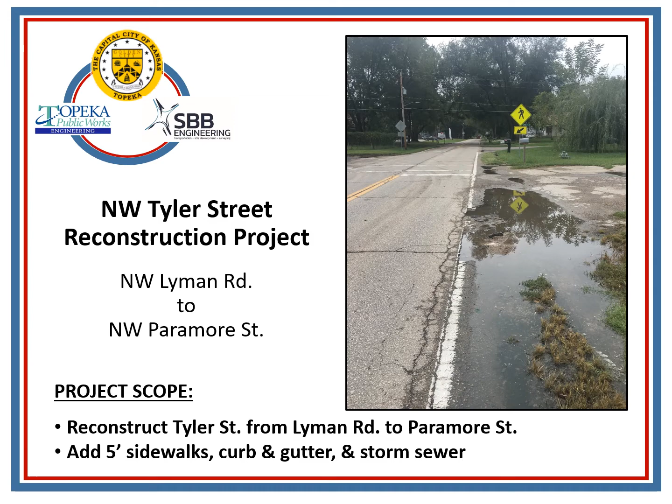The city has selected SBB Engineering to complete the project planning and design work for the city. I'm Brian Austin, and I will be the project manager for SBB Engineering. The project manager for the City of Topeka Engineering Department is Linda Voss. David Bevins is the Community Education Manager for the city. You may contact any of us with questions, ideas, or comments about the project.

The project scope includes the reconstruction of Northwest Tyler Street from Paramore Street to Lyman Road, and it will be completed in 2 phases. Project planning and design is occurring in 2020. Final design and utility relocation will occur in 2021, and Phase 1, Lyman Road to Beverly, will be constructed in 2022. Phase 2, Northwest Beverly Street to Northwest Paramore, is planned to occur in 2025.

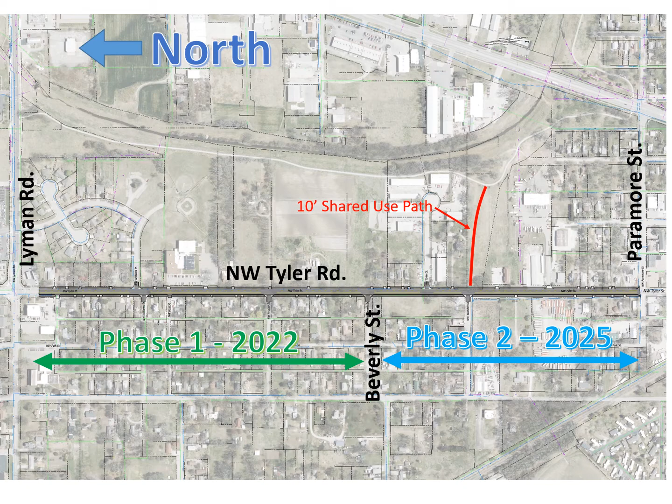So why Northwest Tyler Street? Well, the local desire for improvements to Tyler Street has been around for quite some time. The City of Topeka Planning Department conducted a neighborhood plan for the North Topeka West neighborhood that identified the reconstruction of Northwest Tyler Street as a priority. The Topeka City Council adopted this plan on February 26, 2016.

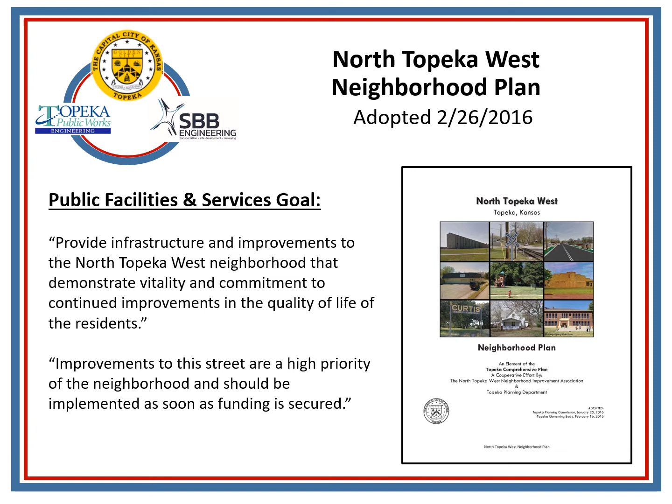The goal noted in the plan was to provide infrastructure improvements to the North Topeka West neighborhood that demonstrate vitality and commitment to the continued improvements in the quality of life for the residents. The plan also noted that improvements to Northwest Tyler Street were a high priority and should be implemented as soon as funding is secured.

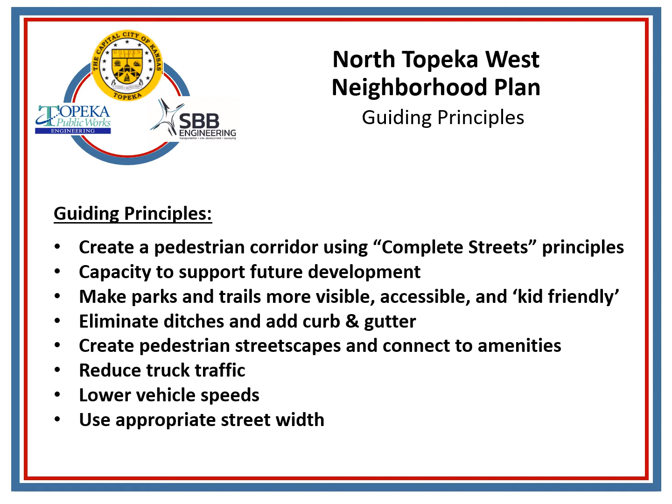What will the project include? The neighborhood plan identified some guiding principles for the project. These principles include creating a pedestrian corridor using complete streets principles, increasing capacity to support future development, make parks and trails more visible, accessible, and kid-friendly, eliminate ditches and add curb and gutter, create pedestrian streetscapes and connect to amenities, reduce truck traffic, lower vehicle speeds, and use appropriate street width.

In order to ensure the guiding principles from the neighborhood plan were incorporated into the project in the most practical and cost-efficient manner, the City of Topeka tasked SBB Engineering to develop 3 concept plans for the corridor. The first concept's focus was to develop a design that focused on low-impact development. The second concept's focus was to develop a 3-lane standard typical section for the City of Topeka that improved safety and roadway capacity by adding a center turn lane.

The third concept was to develop a 2-lane standard typical section that focused on limiting the project's footprint, reducing utility impacts, and limiting vehicle speeds. The pedestrian and bicycle improvements for the corridor were the same for all the concepts, and they will be discussed later in this presentation.

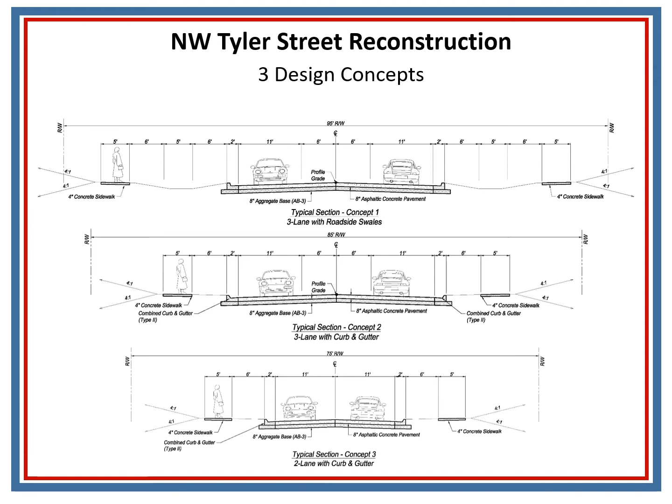Concept 1 focused on low-impact design to reduce the amount of stormwater runoff, take advantage of the site's high permeability soils, and improve stormwater quality runoff through low-impact design and stormwater best management practices such as vegetated bioswales. In order to do this, a 3-lane section was conceptually designed with roadside swales between the proposed back of curb and sidewalk. Curb flumes would convey stormwater runoff to the roadside swales behind the back of curb. This approach would increase infiltration and reduce stormwater runoff.

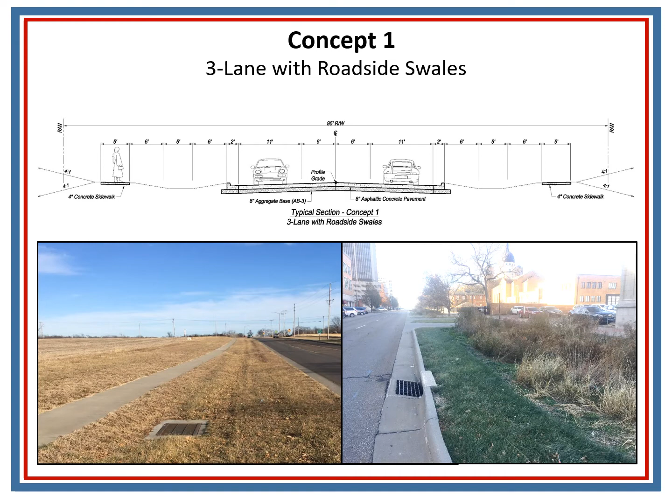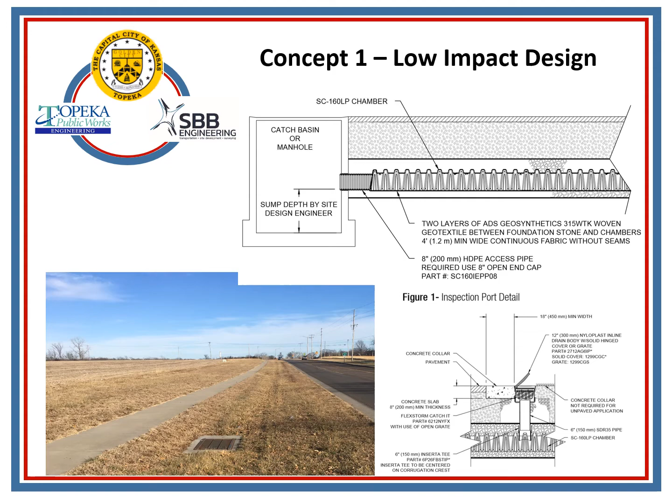In conjunction with this approach, this concept also included using underground open-bottom storm chambers instead of storm sewer pipe to allow for additional infiltration of stormwater. The storm chambers would also be able to convey the higher volume design flows similar to conventional storm sewer pipe.

While this concept would satisfy the focus of reducing stormwater flow and improving stormwater quality, this concept was not chosen to move forward with. There were a number of disadvantages to this concept that limited the benefit it provided. 1. Although the roadside swales would have mild side slopes and would be able to be mowed with any push or riding lawnmower, they may appear to some residents as ditches, which was specifically requested to be removed in the neighborhood plan.

And 3, the presence of roadside swales on both sides of the street would require more area inlets than a street with standard curb inlets. This would result in having parallel storm sewer systems on both sides of the street and would more than offset the cost savings from a smaller storm sewer system.

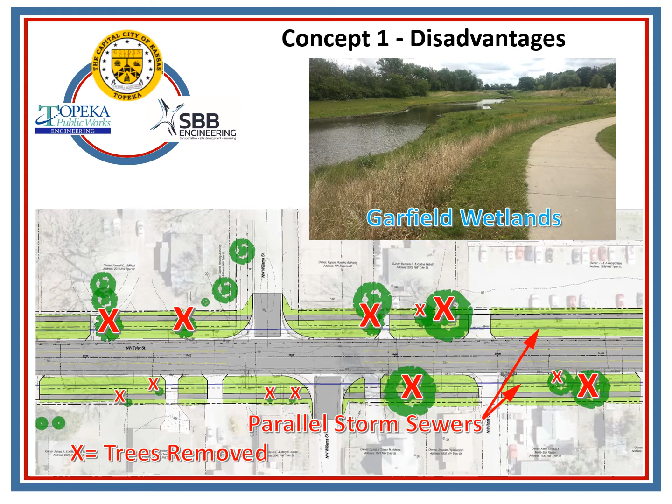In addition to the disadvantages mentioned, there are also downstream detention and water quality improvements in place at the Garfield wetlands. This downstream detention and water quality feature reduces the benefit of any water quality improvements made in conjunction with this project.

Concept 2 is a standard 3-lane typical street section. An example of this improvement is Northwest 46th Street between Topeka Boulevard and Rochester Road. Northwest Tyler Street has 54 driveways and intersections between Paramore and Lyman. This is a high driveway frequency and one that would typically result in the construction of a center turn lane to improve roadway capacity. SBB Engineering and the City of Topeka engineering staff reviewed the 5-year crash history on Northwest Tyler Street during the planning phase.

Although there were 15 crashes within the past 5 years, none of these crashes would have been preventable with a center turn lane. In addition, a traffic count showed that daily traffic is only about 4,000 vehicles per day. Common practice is to start considering a 3-lane section when there's a high number of turning maneuvers and the daily traffic approaches 8,000 vehicles per day. Since the vehicle traffic and crash data did not show that a 3rd lane would result in a significant safety or capacity improvement, this concept was not chosen as the design alternative.

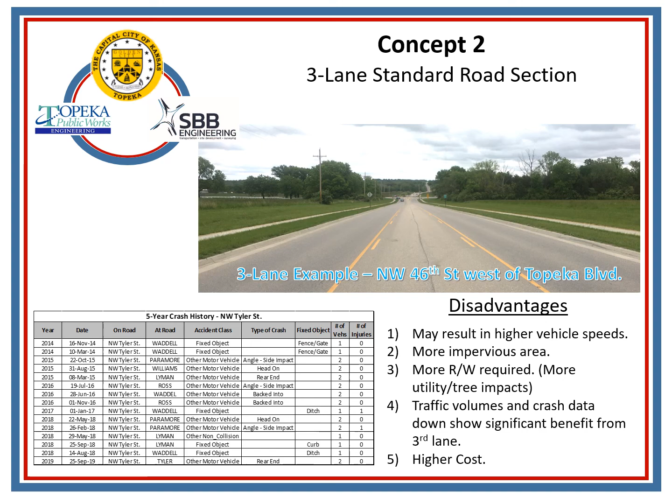Concept 3, which is the concept chosen to move forward with, is a standard 2-lane road section with curb and gutter, sidewalks, and storm sewer. A benefit of this concept is that it may allow the 17-year-old 8-inch water line on the east side of Tyler to remain in place, while the other two concepts would have likely required that it be replaced. The cost savings from not constructing a center turn lane is approximately $350,000. Concept 3 also has the following advantages.

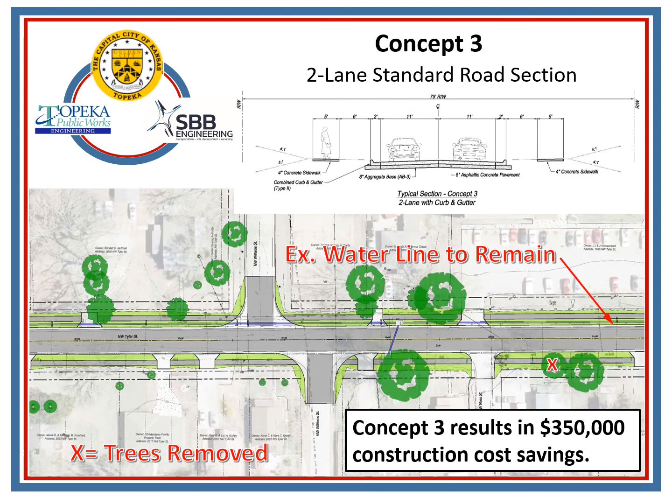1. Drivers will feel less comfortable driving at higher speeds on a narrower roadway than a wide one, resulting in lower average vehicle speeds on a 2-lane road. This is consistent with the desires of the neighborhood plan. 2. Pedestrian safety will be improved by providing shorter crossing distances, reducing the amount of time pedestrians are in the street. 3. Less right-of-way will be required, resulting in fewer utility impacts and fewer trees being removed from the project. 4. A 2-lane road will have less impervious area, and this will result in lower stormwater runoff.

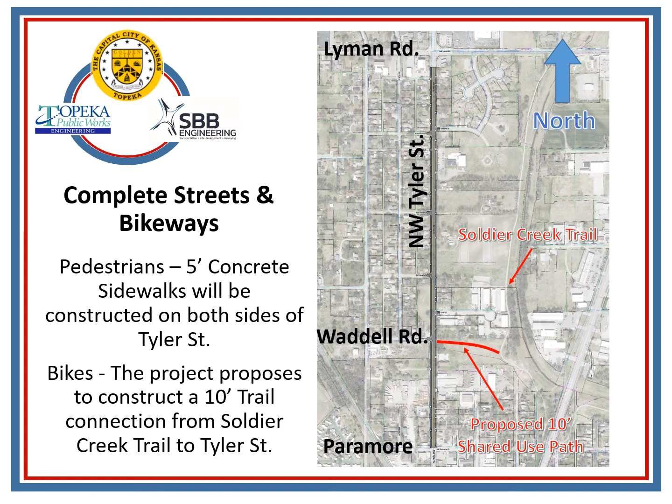Complete streets design. The project will include two 5-foot sidewalks that will be on both sides of the road. This improvement will provide pedestrian accessibility in accordance with the Americans with Disabilities Act along the entirety of the improved route. Bicycle improvement is also planned as part of the project. The proposed improvement is to construct a 10-foot wide concrete shared use path from the intersection of Tyler and Waddell to the Soldier Creek Trail in the vicinity of the Curtis Family Cemetery. This trail will be constructed on City of Topeka property and will not require any additional easements or right-of-way.

Bike lanes or a shared use path are not planned to be a part of the Tyler Street right-of-way for a number of reasons. 1. Parallel routes exist on either side of Tyler Street that provide reasonable accommodations for bicycle traffic. The routes include the Soldier Creek Trail approximately 700 feet east of Tyler and Northwest Polk Street approximately 200 feet west of Tyler. While Northwest Polk Street isn't a designated bike route, it's less than 500 vehicles per day and is a safe route for any level of rider.

2. Northwest Tyler Street is not listed as a bike route in the Topeka Bikeways Master Plan. With Soldier Creek Trail being in close proximity to the project, the money saved on this project can be allocated to completing other routes in the Topeka Bikeways Master Plan. 3. With traffic volumes under 4,000 vehicles per day, the vehicle traffic is low enough that experienced and confident riders can ride in the street and less experienced or non-confident riders can use the sidewalks.

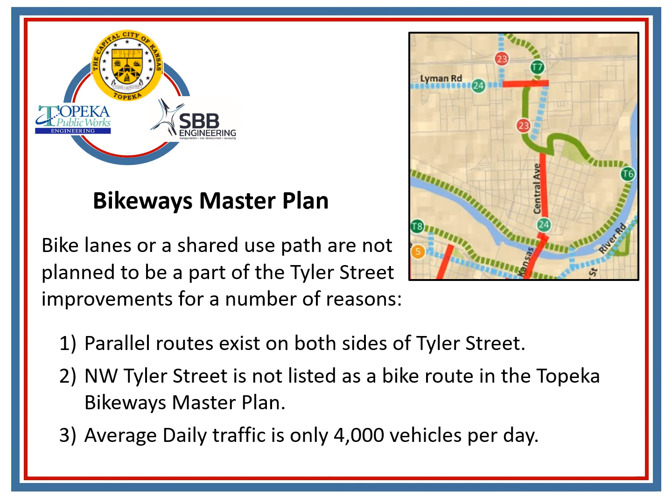Summary and recommendations. The design concept proposed is Concept 3, which is a 2-lane road with curb and gutter, storm sewer, and 5-foot concrete sidewalks on both sides of the road. This concept was chosen because the existing traffic, projected traffic growth, and 5-year crash data do not show a significant capacity or safety benefit by adding a 3rd lane. A 2-lane road section will also likely result in lower vehicle speeds, shorten the crossing distance for pedestrians, and save approximately $350,000 in construction cost.

While requiring additional evaluation, a 2-lane road may also save city taxpayers money on waterline replacement costs. A 2-lane road will result in less impervious pavement than the other 2 options, which will reduce stormwater runoff. A 2-lane section will also require less right-of-way and easement acquisition, result in fewer utility impacts, and reduce the number of existing trees that need to be removed. Bicycle accommodations will be provided by connecting the Soldier Creek Trail to Tyler Street with a 10-foot shared use path.

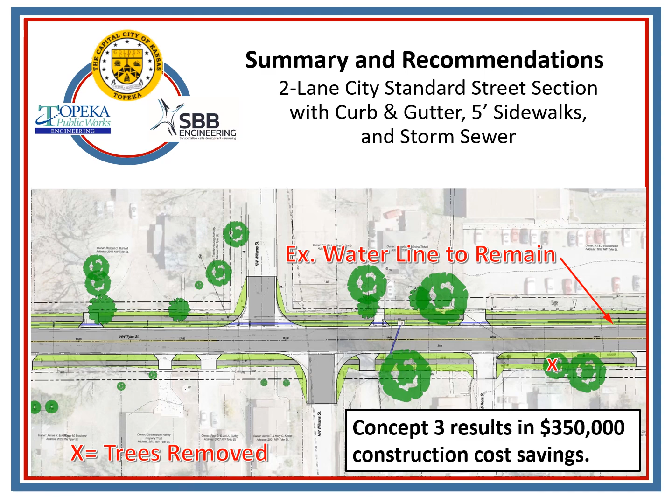Next steps. Now that the design concept has been recommended, the design and utility coordination work on the project will begin. The next public presentation will occur near the end of the design phase in 2021 when more specific information about property and utility impacts is known.